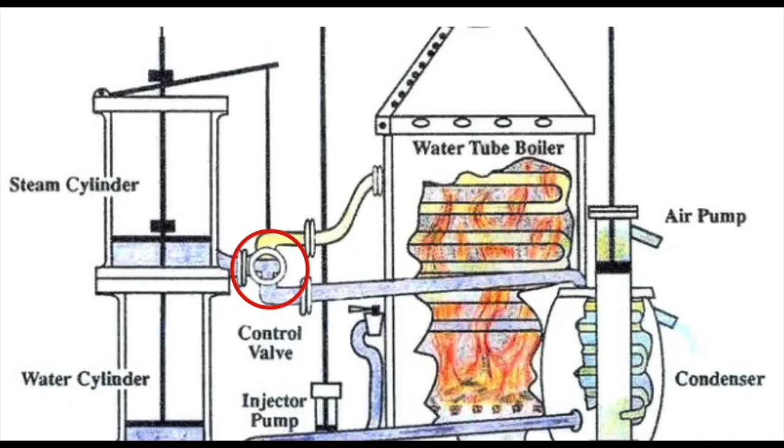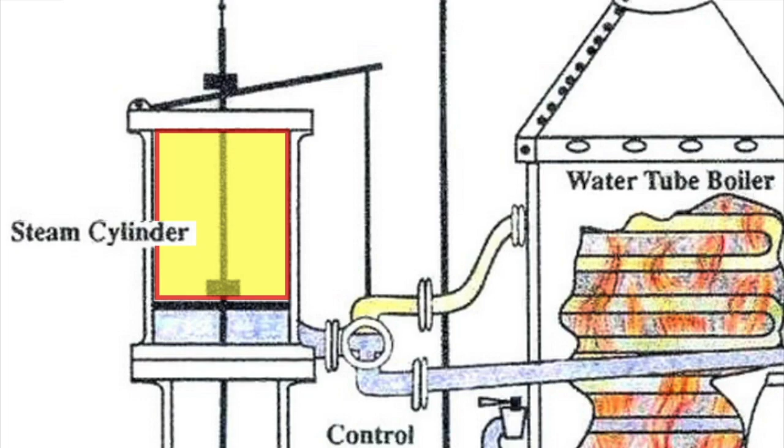The thrust or vacuum stroke. When the control valve is flipped, the steam cylinder is connected to the condenser, which condenses the steam, creating a vacuum. Because of the vacuum in the steam cylinder, air pressure now pushes the steam piston and water piston down, forcing water out of the water cylinder, through the trunk line and out the stern.

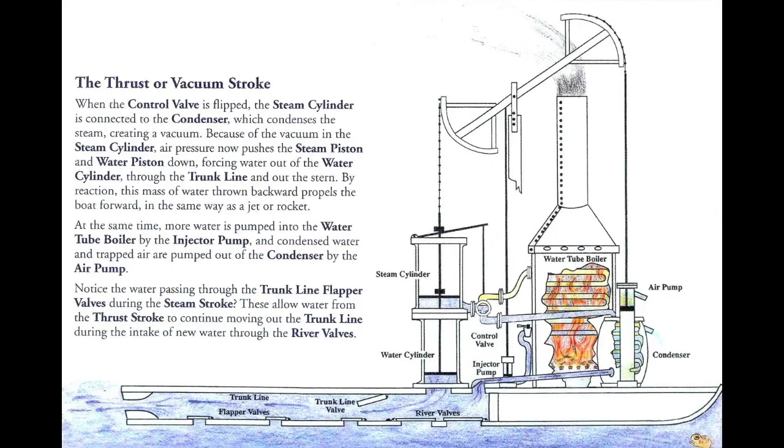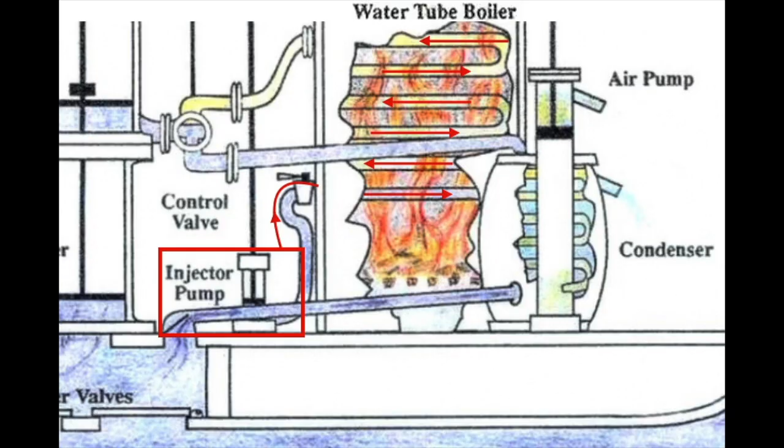By reaction, this mass of water thrown backward propels the boat forward in the same way as a jet or rocket. At the same time, more water is pumped into the water tube boiler by the injector pump, and condensed water and trapped air are pumped out of the condenser by the air pump.

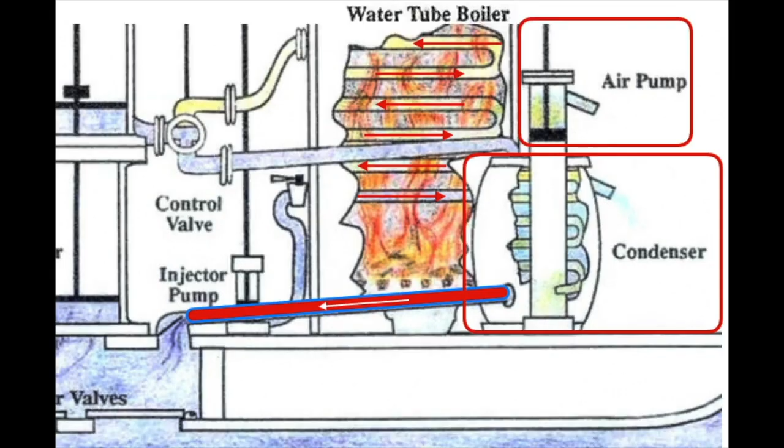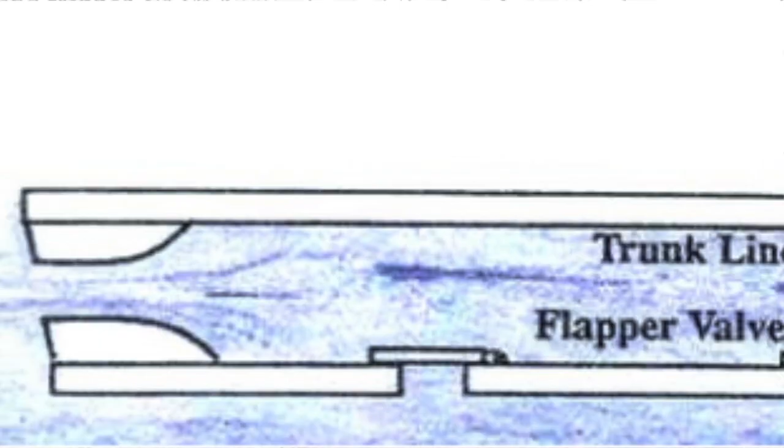Notice the water passing through the trunk line flapper valves during the steam stroke. These allow water from the thrust stroke to continue moving out the trunk line during the intake of new water through the river valves.

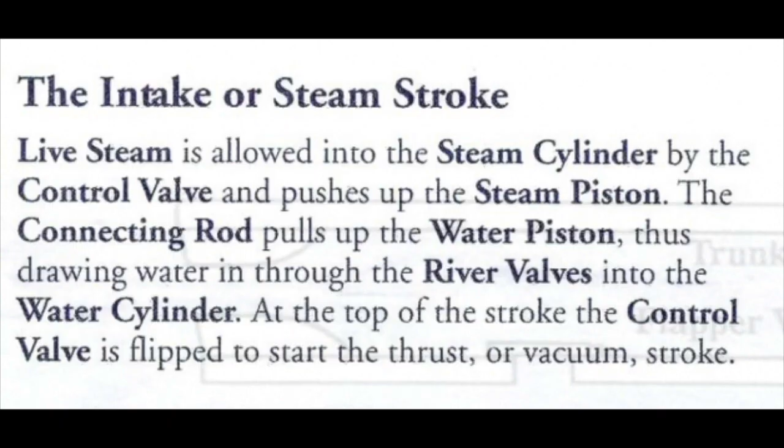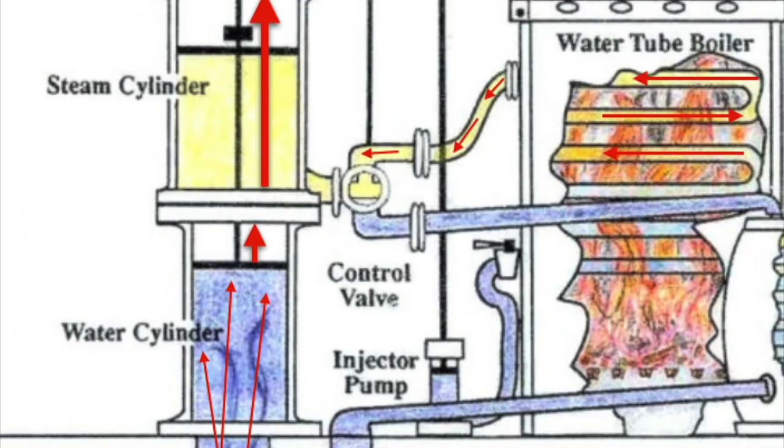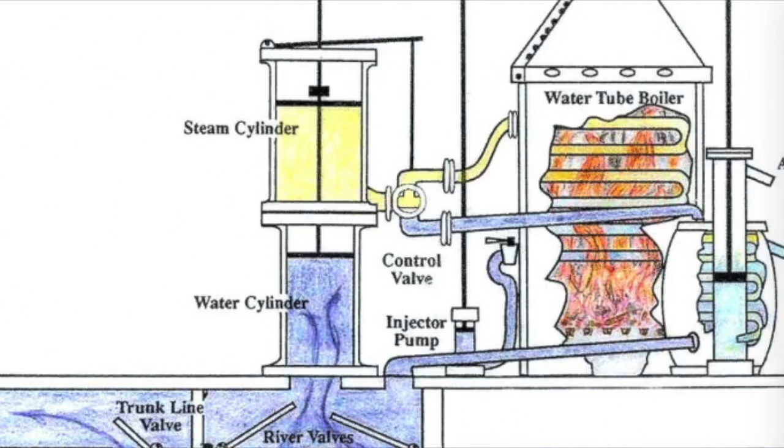The intake or steam stroke. Live steam is allowed into the steam cylinder by the control valve and pushes up the steam piston. The connecting rod pulls up the water piston, thus drawing water in through the river valves into the water cylinder. At the top of the stroke, the control valve is flipped to start the thrust or vacuum stroke.

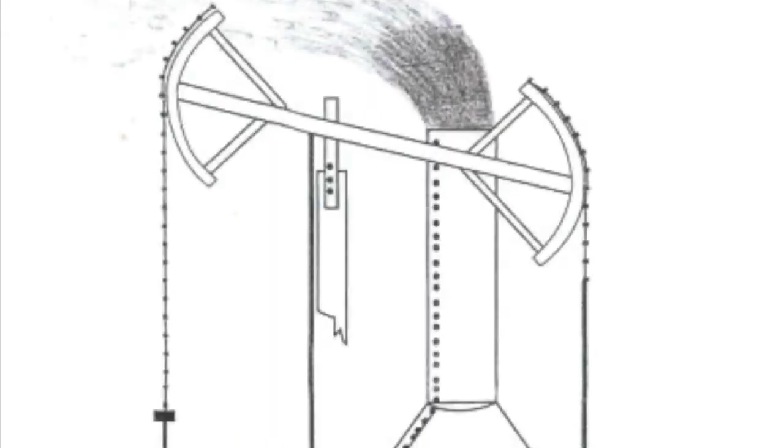Rumsey needed Boulton and Watt's skills and resources. This boat, tried in Shepherdstown, was made from local iron ores, scraps from musket barrels, lead solder, tin, and the wood from endless forests. It moved, fully loaded, against the current, sometimes at 4 miles per hour. But the 200 feet of tubing comprising the boiler and assembled by the brazing process sprung leaks.

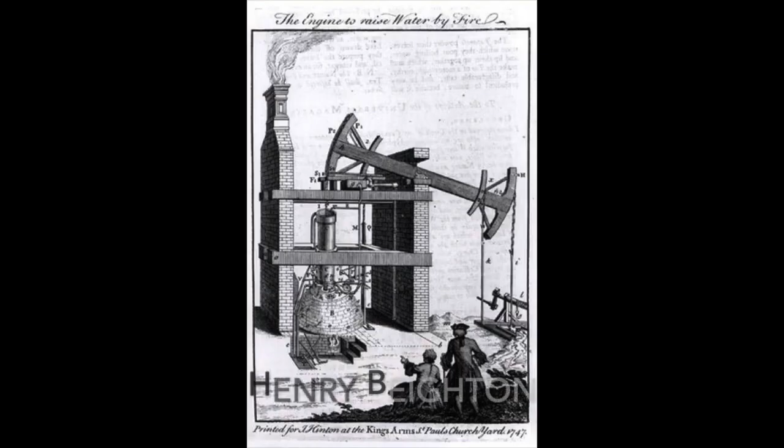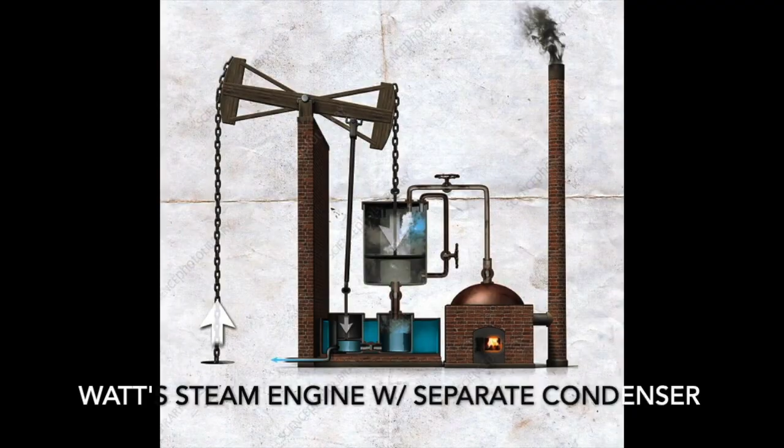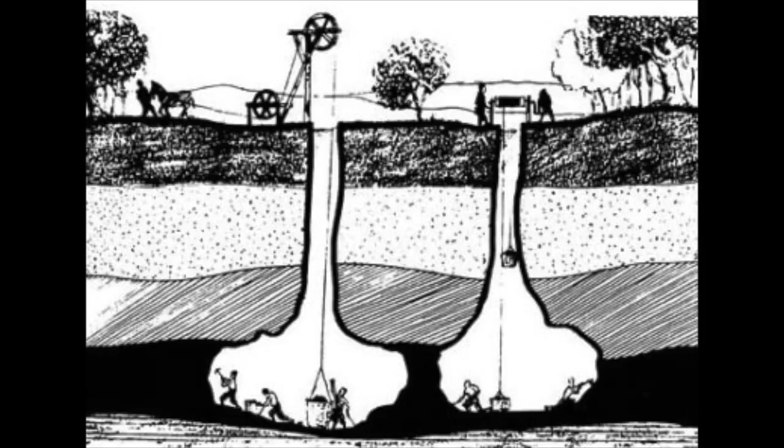They certainly could help him. Boulton's partner, the abstracted James Watt, had added a condenser to the inefficient Newcomen steam engine that had been used to little effect to relieve England's mines of water. Watt's enormous improvement to the engine triggered the Industrial Revolution in England because water-free mines could be dug deeper and to much more coal. But Watt's steam engine was too big for most boats.

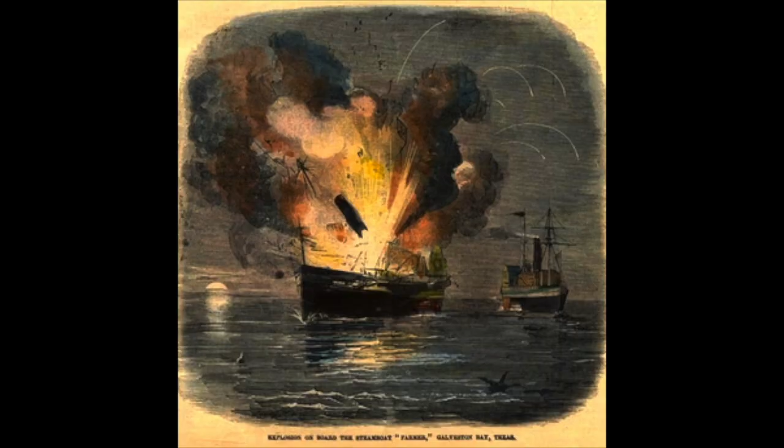Rumsey's smallish water tube boiler for a smallish steam engine-driven boat was a true step forward, and even a few steps ahead of Boulton and Watt. Watt feared that all the pressure within those many-angled pipes of the tube boiler would cause fierce explosions, a problem that did occur in later years with improperly made water tube boilers on boats. But Rumsey's boiler occupied a fraction of the space on a boat than would Watt's big steam engine.

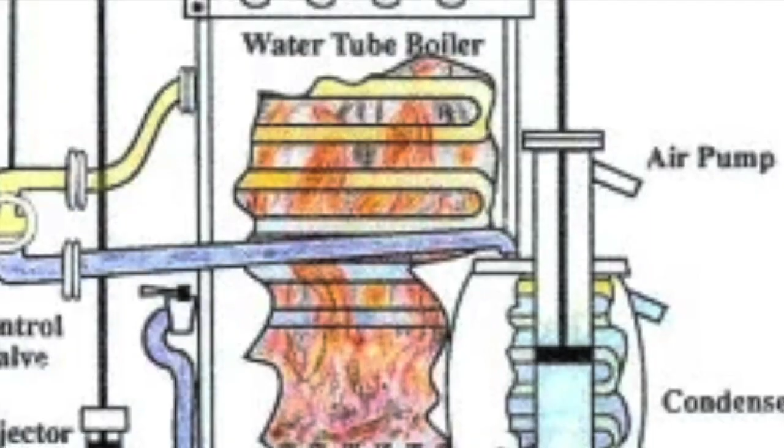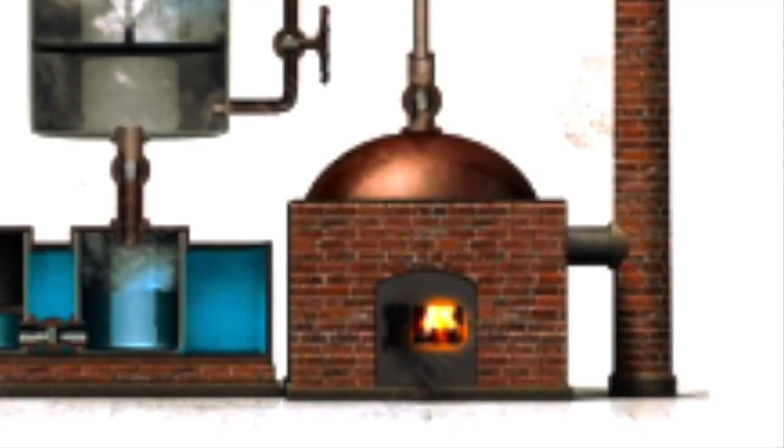Unlike Watt's, Rumsey's boiler design heated the water more efficiently because it exposed it uniformly. Rumsey's boiler, with its 200 feet of joined iron tubing, carried water as it was being heated on all sides by surrounding flame, all within the boiler. Watt's was the reverse, a heat-generating tube that heated unequally all the water that filled the boiler's general space. He called it an atmospheric boiler.

When Britain first at heaven's command, arose from out the azure main, arose from out the azure main.

On July 3rd, the three met for the first time at Boulton and Watt's offices in Birmingham. They worked, negotiated together with high hopes for 2 months. They agreed to form a partnership. They promised Rumsey the services of their master mechanic, a Mr. Handley, and Rumsey was to report regularly on the progress he and Handley made on his demonstration water tube boiler steamboat.

But Rumsey was dismayed when he read Boulton's proposed agreement, especially that Boulton and Watt would claim all forms of steamboat navigation as their own. Rumsey and Vaughan wrote a letter on August 6th to Boulton, stating that he had no connection with Boulton and Watt, that they didn't need Mr. Handley, and that they could make steamboats in Ireland, where English patents were often disregarded. They also refused to abandon their Rumseian Society backers back home.

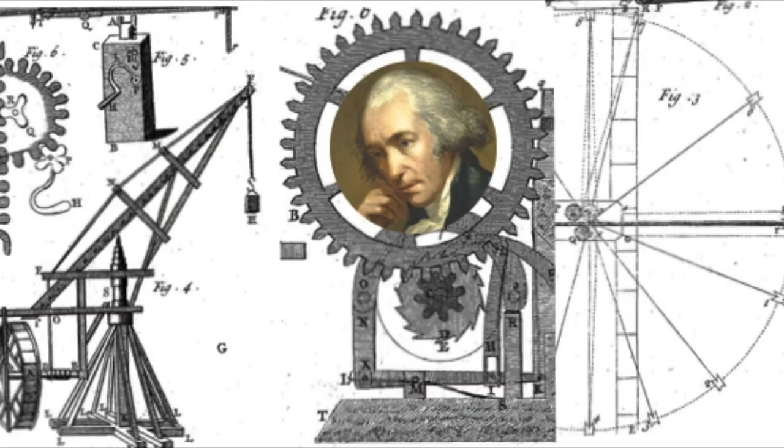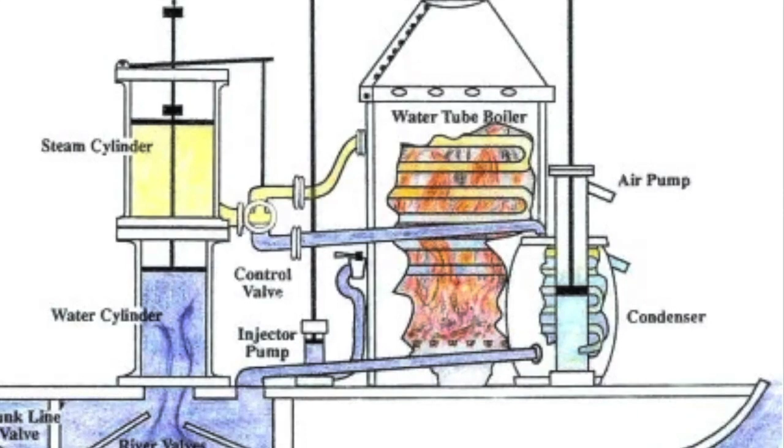As to boilers, you must allow me to observe that Mr. Watt was the first and only discoverer of the precise quantity of water and the exact quantity of steam of a given elasticity, as well as the knowledge of the total quantity of the heat producible by a given measure of such coals as this country produces, and thereby we are enabled to know the utmost limits of boilers.

I can't help but smile at Mr. Vaughan's reasoning upon the subject, which I own is very ingenious. But my opinion is that when he hath tried as many boilers as we have, hundreds, he will have discovered some mistakes in it. There are many cases in which your boiler cannot be used, and there are many in which it may, and therefore we wish not to discourage you from taking out a patent for it, and will render you any assistance in our power in the introduction of it.

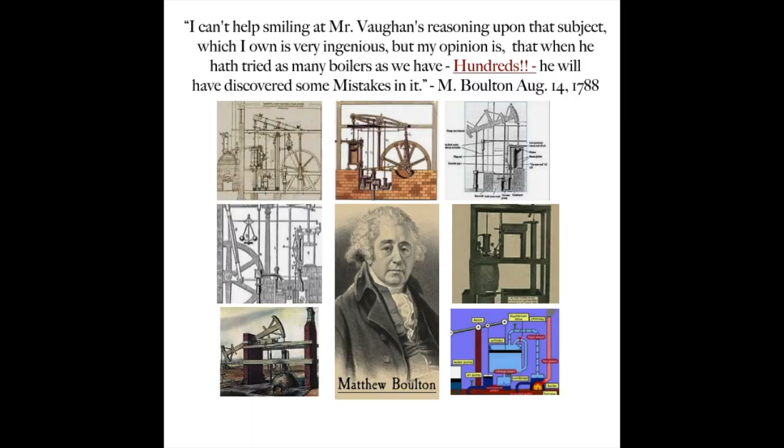It now appears to me that our sentiments are not in unison, and that you have mistaken your road to the goal in view. However, I shall forbear saying more until I have had a conference with Mr. Watt upon the subject, and interim remain, Sir, your most obedient humble servant.

The next day, the agitated Boulton wrote his partner Watt: Vaughan seems to have the total possession of Rumsey, but he shall never have possession of me. That part of Vaughan's letter in which he intimates that if we are not connected with Rumsey, other machinists may be found, and the engines may be made in Ireland where no regard is paid to patents.

This shows the principles of the man in so clear a point of view that I cannot express how much I detest him. But perhaps you'll say I'm in a passion, and perhaps I am, and I hope I shall never be so void of feeling as to be insensible to such rascally principles. There is a sycophantic affectation of respect and threat through his letter.

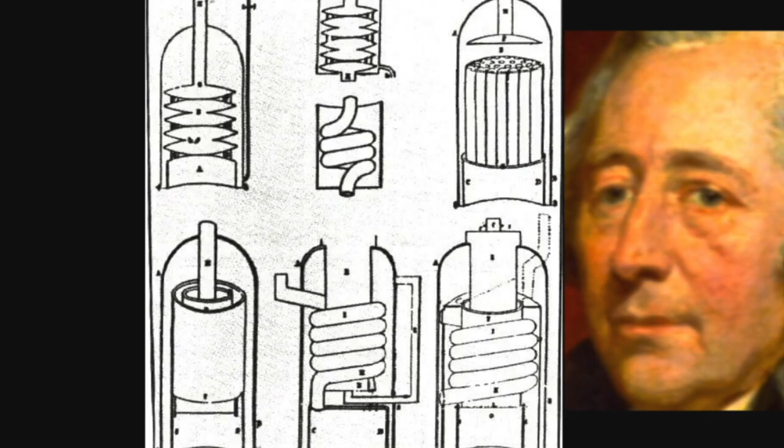In regard to your new boiler, consisting of a narrow tube bent in a spiral or zigzag form containing the water within it and having the fire or flame applied to the outside of it, the drawing of which you showed us, we shall give no opposition to your obtaining a patent for it and shall observe the necessary secrecy until that patent is completed, in which we wish you success.

We beg leave, however, to remind you of what we formerly mentioned to you, that boilers consisting of tubes bent in similar manner, but having the fire or flame passing through the inside of them and the water on the outside, have been made, both by ourselves and others, and that our James Watt once made a boiler, the grate bars of which were hollow tubes on which the fire rested, under an arch of metal surrounded with water.

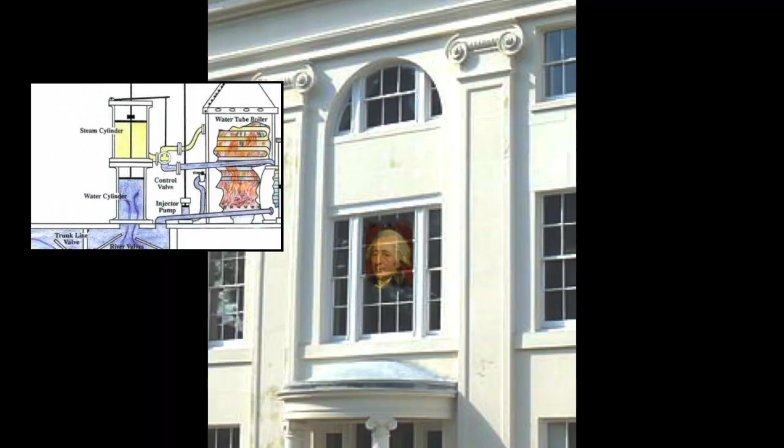It is with regret that we find ourselves obliged to say that we cannot resign our claim to the use of the method of employing the power of steam engines to the propelling of boats by the reaction of water confined in tubes and acted upon by pistons or oars, and also in rivers and canals by means of poles acting upon their bottoms, and the same candor you have observed towards us obliges us to inform you that we shall immediately take steps as will render any patent for that purpose of no avail.

Rumsey, with his motto, "Conquer or Fall," charged ahead to build the much-desired demonstration of the steamboat, which he called the Columbia Maid, again with little funding and relying mostly on his own mechanical skills. Conquer or fall, Rumsey was carried by what George Washington once called his overflowing evolutions.

This is the time when he got his posterity portrait painted by fellow expatriate Benjamin West, who incidentally had an artistic apprentice named Robert Fulton, who had an inquiring mind that written records indicate Rumsey engaged. The fresh air of freedom in his work fed an extraordinary 4-year period of profound invention that in the end wore his brain out.

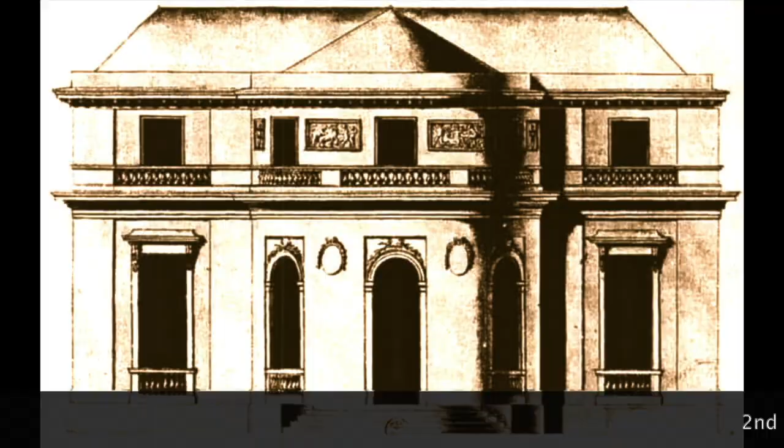In March 1789, Rumsey set aside his intense work on the Columbia Maid and went to Paris to see Ambassador Thomas Jefferson. He wanted to discuss a common interest, patent law in the new United States. The humorist Rumsey described his day with Thomas Jefferson to an old friend.

"I have this day had a good ride upon my hobby. It was by the particular request of our American ambassador that I took this ride, and glad I was of the opportunity of mounting, having been so long out of practice, by being in a country where the people could not understand the language in which I explained Hobby's gaits. Mr. Jefferson's hotel was the place appointed for me to exercise, and I had not been long mounted before Mr. Jefferson bore me company. And fine sport we should have had, would time have permitted.

But dinner time came on, and company arrived that had been invited to dine. The horse was therefore obliged to be stabled. However, Mr. Jefferson was so pleased with Hobby that he borrowed him of me with the explanation of his gaits. I know very well that what I have said will convey to you a very clear idea of the business of the day, but I beg you not to explain it to anybody, not nobody, in the same way.

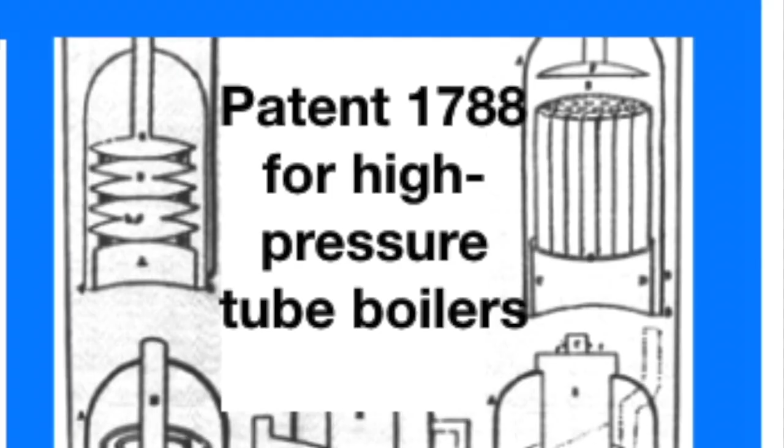Or the 1790 patent, in which Rumsey wrote and illustrated that since fluids under pressure give pressure in all directions equally, a steam cylinder could therefore be placed on its side on a shallow-draft flat-bottomed boat and on the same deck as the paddle wheels.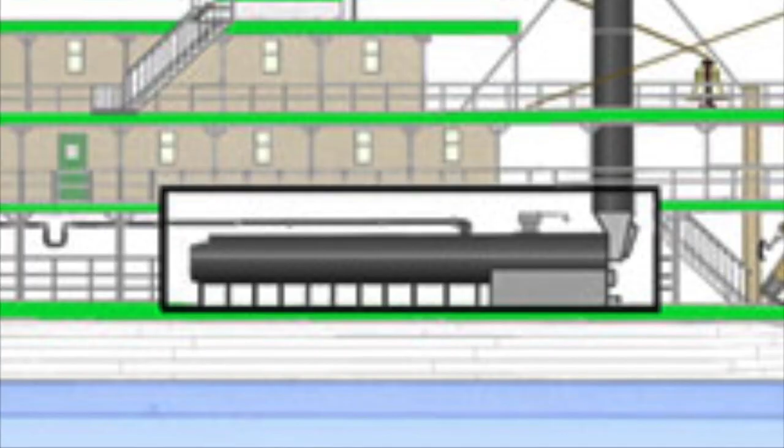Rumsey wrote that if the steam cylinder was then connected to the paddle wheels using a long connecting rod or pitman, all of the boat's propulsive system could be placed on just one deck instead of two. A very important and necessary invention for boats in shallow waters, like parts of the Mississippi, which Rumsey refined more in his 1792 patent.

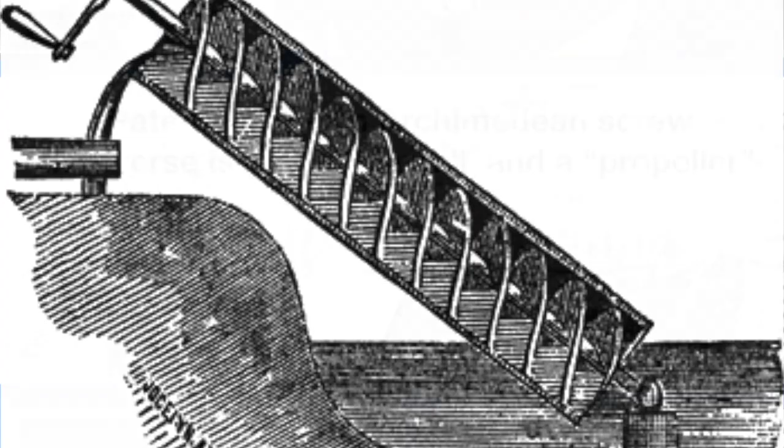Or Rumsey's speculations in his 1792 patent using Archimedes' screw pump, a water screw pump with a helical column inside a pipe, turning a handle at one end to carry water up through the pipe, as the water is caught in the spiral grooves and is lifted as they rotate. Rumsey imagined running this procedure in reverse, propelling the water away from the user, with that force used as mechanical power.

Thus, he anticipated the screw propeller that by 1830 was replacing Fulton and Watt's paddle wheel concept. Edwin Layton writes that today the screw propeller for propulsion is manifest on ocean-going vessels and jet-propelled aircraft.

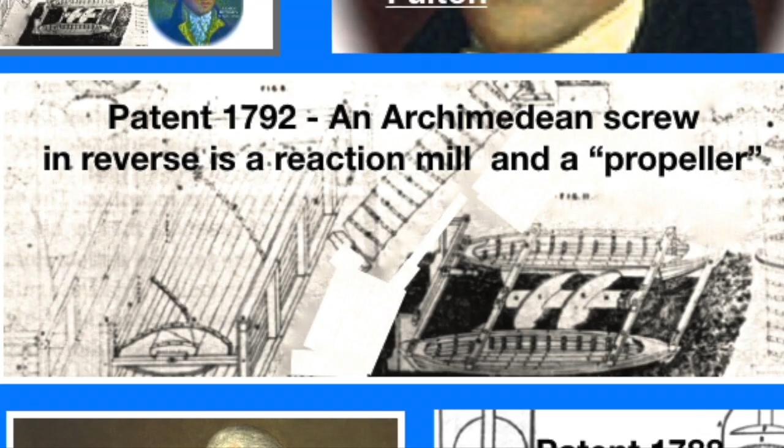And in his 1792 patent, he made improvements to the Barker's mill, also called a reaction mill, suggesting the inclusion of vanes inside the wheel and vanes that overlap the outside of the wheel of the reaction mill. The design of these vanes, according to Layton, paved the way for a reaction turbine with a potential efficiency of 100%, and was an insight which in time became one of the fundamental design principles for turbines.

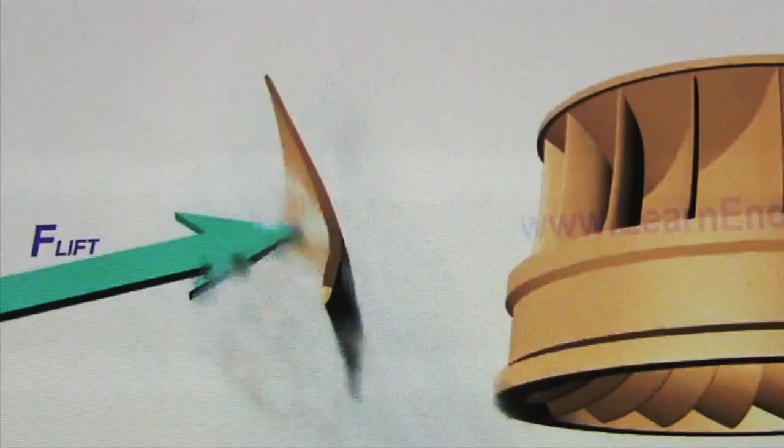Rumsey's brother-in-law Joseph Barnes contracted Rumsey mills for the American Philosophical Society, building many such Rumsey-certified reaction mills with excellent results throughout the mid-Atlantic states.

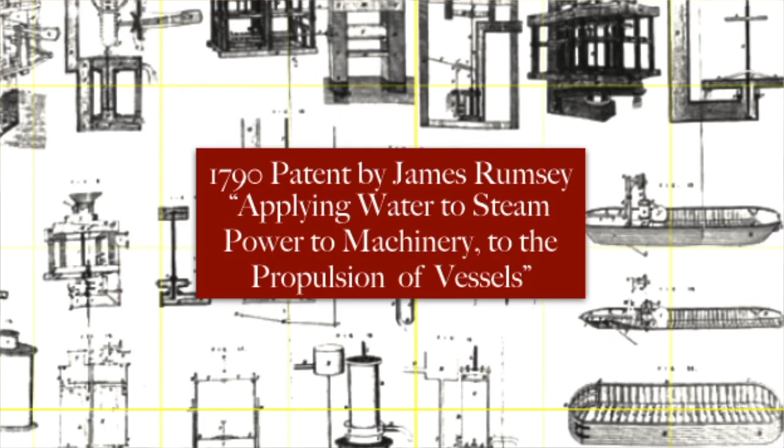Or there is the Royal Patent number 1738, dated March 23, 1790. According to Jeannie Mosier of the Berkeley Springs Museum, Rumsey patented a number of new and improved methods of applying the power of water, of air, and of steam to the purposes of milling. The inventions include a progressive and retrograde water mill, improvement on Dr. Barker's mill, retrograde machine for sawmills, and inverted steam engines for raising water.

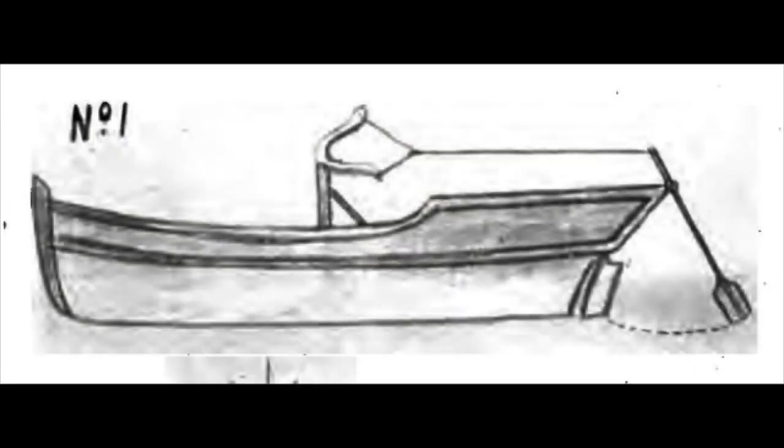In 1793, Fulton maintained a folder on Rumsey's patents and drew his first draft of the Clermont. Six months after Rumsey's death, Fulton wrote to Lord Stanhope, a prospective backer, that he began his "experiments on the steamboat" that June 1793. On November 4th, 1794, he wrote Boulton and Watt, wanting to buy "a steam engine designed to be placed in a boat," and he wished it to have as little space as possible. Time went by.

According to Messrs. J. and W. H. Rankine, many years later, in their book, Mr. Fulton, it is proved beyond the possibility of dispute, was on board William Symington's first steamboat, called the Charlotte Dundas, and in the month of July 1801, was carried in her 8 miles on the Forth and Clyde Canal in an hour and 20 minutes, receiving explanations and taking sketches both of the boat and her machinery, prior to his being able to succeed in propelling a steam vessel on the Hudson River in America in 1807.

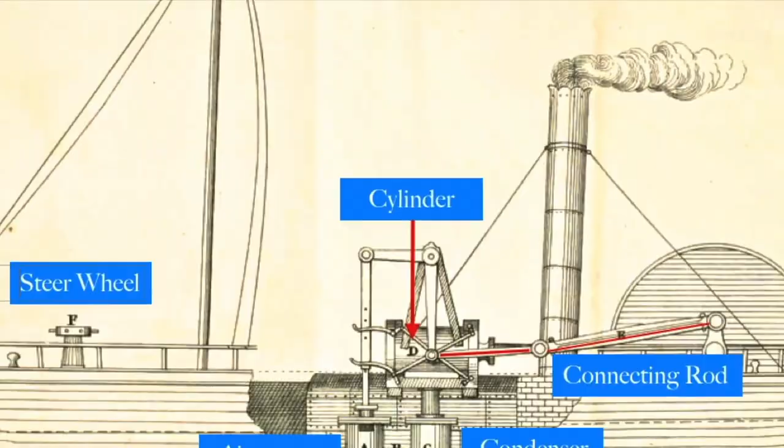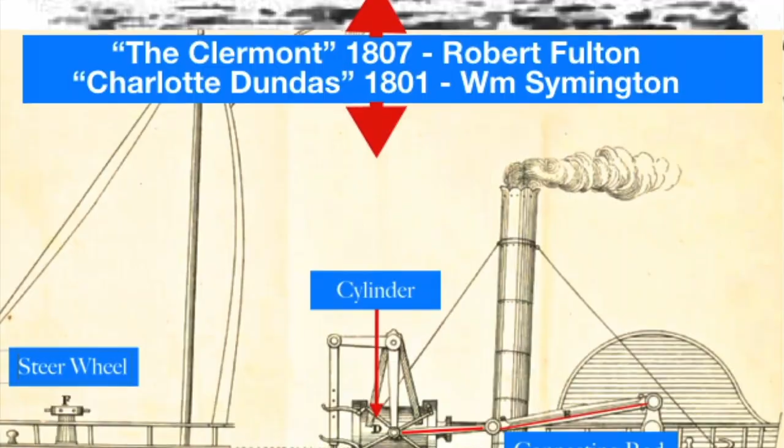The Charlotte Dundas, a victim of lapsed funding, was indeed the first commercially viable steamboat, and Fulton's Clermont had much of its design and details. Neither the Charlotte Dundas nor Fulton's Clermont utilized Rumsey's tube boiler. But Rumsey stuck by the merit and superiority of even the earliest patented boilers that he created.

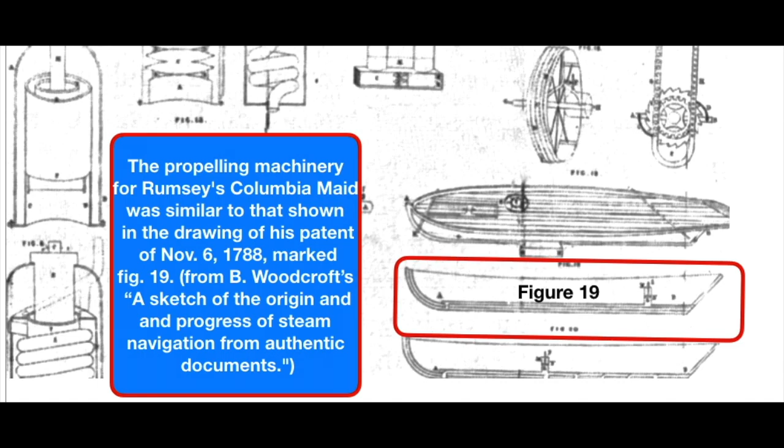Wrote Bennett Woodcroft many years later, "The propelling machinery for Rumsey's Columbia Maid was similar to that shown in the drawing of his patent of November 6, 1788, marked Figure 19." Rumsey's true legacy is revealed.

On January 21, 1805, Fulton bought the steam engine for his prospective steamboat from Boulton and Watt for £548. Politically determined restrictions against shipping this prized British creation to the United States were lifted. And it was not an engine with a tube boiler like Rumsey's, but instead James Watt's larger, improved, but still low-pressure steam engine.

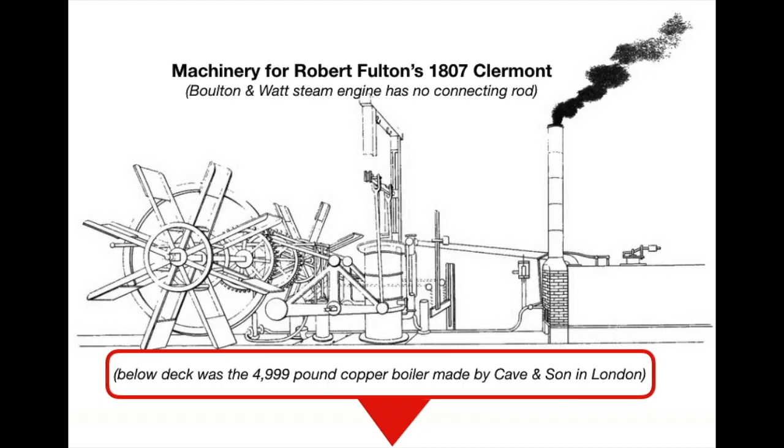It appears Fulton opted for the steam engine that had a record of prolonged performance, as shown on Symington's Charlotte Dundas. And even if it lacked the efficiencies of Rumsey's high-pressure tube boiler, Fulton dressed out his steamboat with one thing Rumsey did not employ: paddle wheels, to make up for any lack of motive power.

On August 17, 1807, Fulton's Clermont worked beautifully, and the decades of laughter at steamboats stopped right there that day at the shoreline of New York's Hudson River. Fulton succeeded grandly. The world changed. Fulton was a brilliant aggregator who was at the right place, the Hudson River with steep bluffs on all sides, and New York City with deep pockets of investors on all sides.

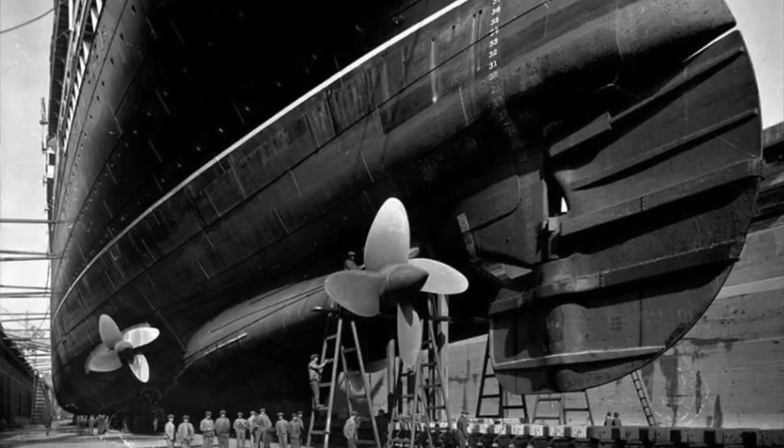In a decade or two, ironically, Rumsey's ideas were realized on many fronts. It would come to pass that the screw propeller, not paddle wheels, propelled ocean-going vessels in the high seas. And even still today, Rumsey's ideas continue to assist around the world in real operations, especially as the preferred means to bring us electrical power.

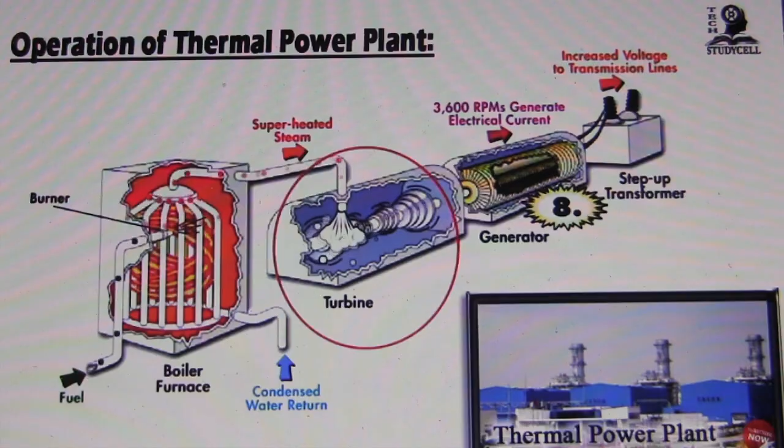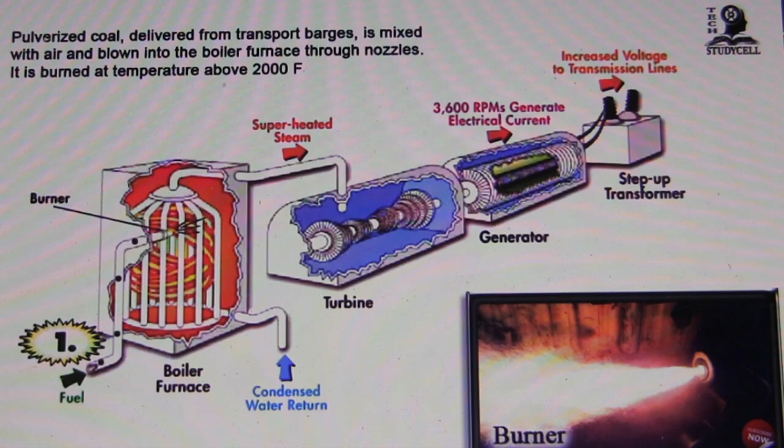alternator, and transformer. Now at first pulverized coal, delivered from transport barges, is mixed with air and blown into the boiler furnace through nozzles. It is burned at a temperature above 2000 Fahrenheit. The boiler is a rectangular furnace about 50 feet on a side and 130 feet tall. Its walls are made of a web of high-pressure steel tubes about 2.3 inches in diameter. Here the chemical energy in coal becomes heat energy when the coal is burned in the furnace.

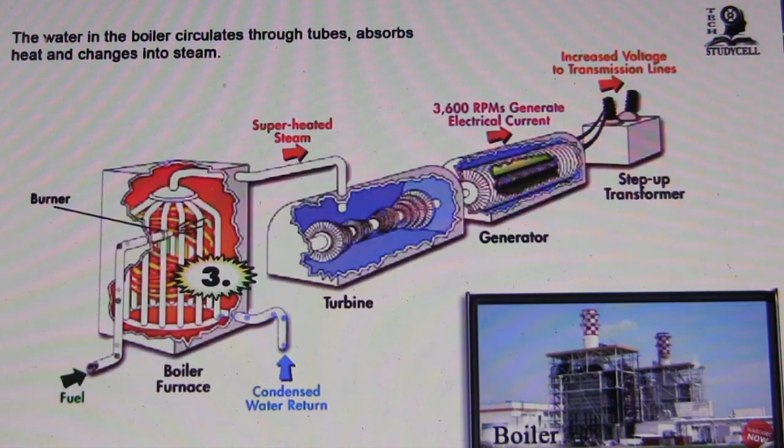The water in the boiler circulates through tubes, absorbs heat, and changes into steam. Then the steam is separated from the water inside a drum at the top of the furnace. The saturated steam is introduced into superheat pendant tubes that hang in the hottest part of the combustion gases as they exit the furnace. Here the steam is superheated to 1000 Fahrenheit to prepare it for the turbine.

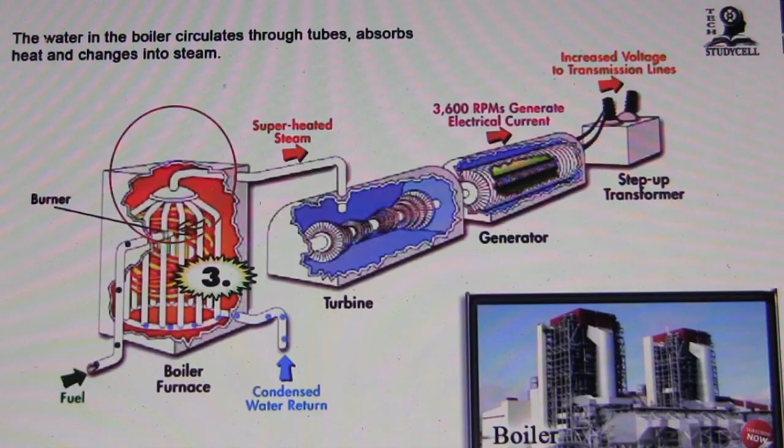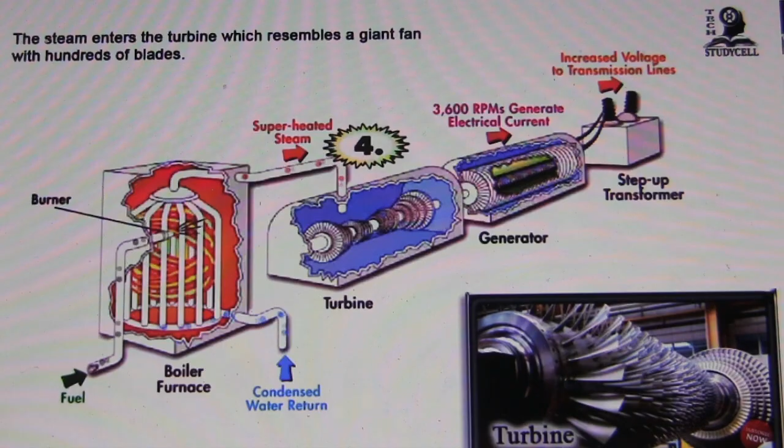The steam turbine resembles a giant fan with hundreds of blades. High-capacity power plants use different stages of steam turbines, such as high-pressure turbine, intermediate-pressure turbine and low-pressure turbine. In order to turn the steam turbine, you have to supply high pressure and temperature steam at the inlet of the turbine. As the turbine absorbs energy from the high energy fluid, its pressure and temperature drop toward the outlet.

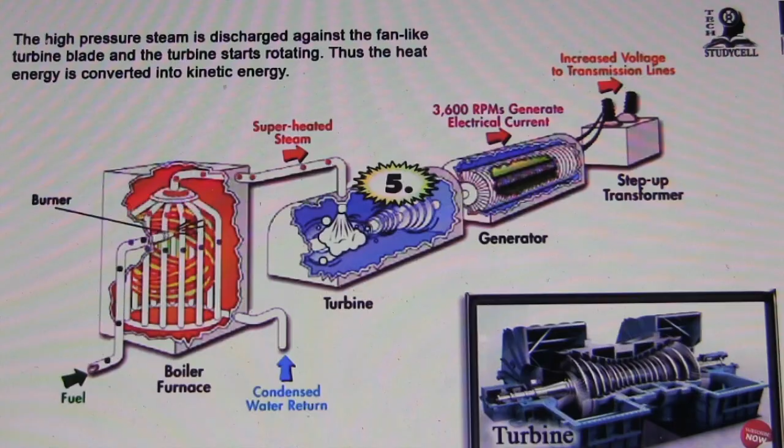Now the high pressure steam is discharged against the fan-like turbine blades and the turbine starts rotating. Thus the heat energy is converted into kinetic energy. The steam turns the turbine blades, which turns the shaft, which is connected to the generator. The generator is where mechanical energy is converted into electrical energy.

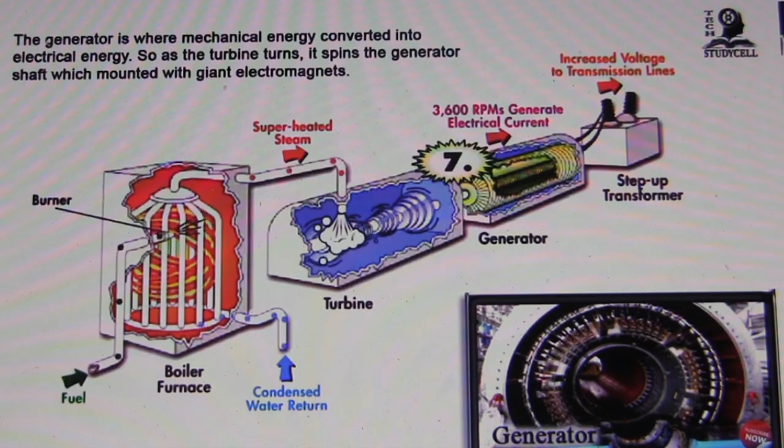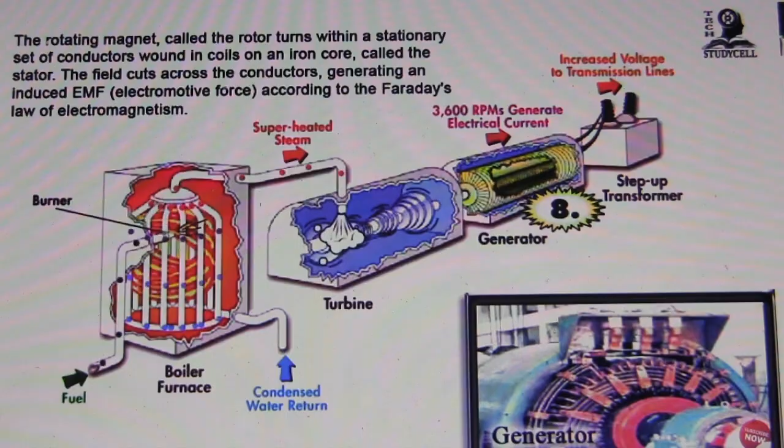Now as the shafts of the turbine and generator are mechanically coupled, as the turbine turns, it spins the generator shaft, which is mounted with giant electromagnets. The rotating magnet, called the rotor, turns within a stationary set of conductors wound in coils on an iron core, called the stator. The field cuts across the conductors, generating an induced EMF, electromotive force, according to Faraday's law of electromagnetism, as the mechanical input causes the rotor to turn. Thus the mechanical energy in the turbine is changed to electrical energy in the generator.

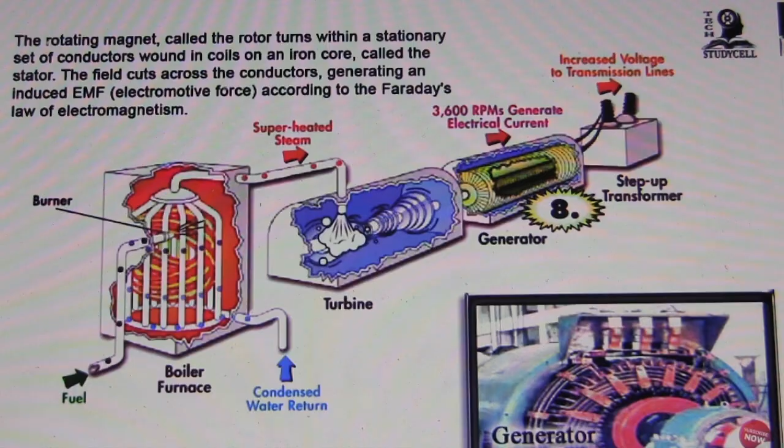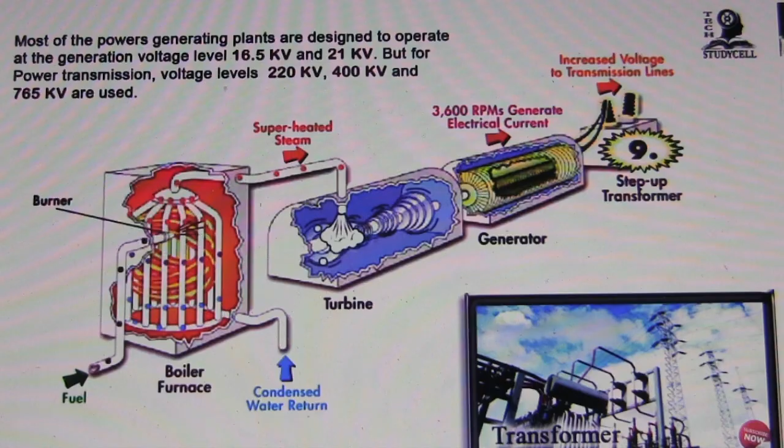It is cheaper to generate at a relatively lower voltage and then step it up for transmission to reduce transmission loss. The generated electrical energy leaves the generator and goes to a step-up transformer, where the voltage is raised to transmission voltage. Most power generating plants are designed to operate at generation voltage levels of 16.5 kV and 21 kV. But for power transmission, voltage levels of 220 kV, 400 kV, and 765 kV are used. Thermal power plants help meet almost half of the world's power demand.